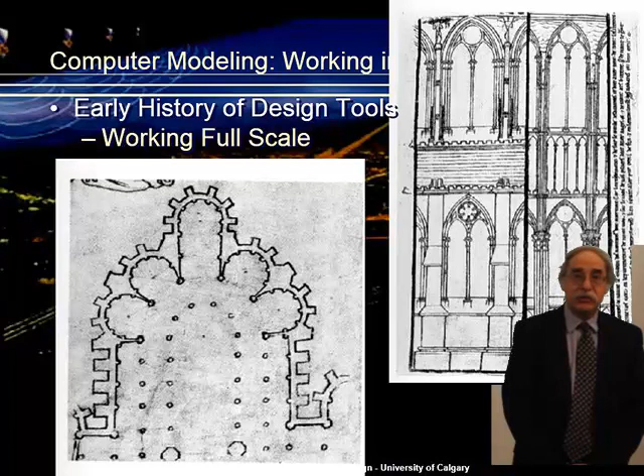We also see the use of models, fairly large models in some cases, that were used to impress the client. Now, these models could cost as much as a small building, but they were used to get the idea across to their clients—not so much to create the design itself as part of the design process, but more for marketing as we think of it today.

So in the history of design tools, we're looking at architectural drawings in the Renaissance that architects use today. These architectural design drawings include things like perspective, elevation, section, and plan. All these drawing types were actually mentioned by Vitruvius, a military engineer and architect of the 1st century BC.

If we look at architectural drawings from the 15th, 16th, 17th century, what we see is that architects are using plan and elevation to actually design their buildings. The interesting thing about plan and elevation is you can take measurements off them and you can scale your drawings, so it becomes a tool for actually managing the construction process.

Here we have one example of an elevation study done by Andrea Palladio in his four books on architecture, published in 1570. The interesting thing about these drawings is that you can use them to actually monitor the construction process. These drawings become an example for all architects for the next three or four centuries. In fact, I don't know too many architects today who don't know about Andrea Palladio's treatise.

If you think about CAD, CAD is actually a 3-dimensional object behind the screen projected onto a 2-dimensional surface. If you think about CAD as nothing more than an extension of perspective, then we really have this history that goes back to the Renaissance when we're working with CAD.

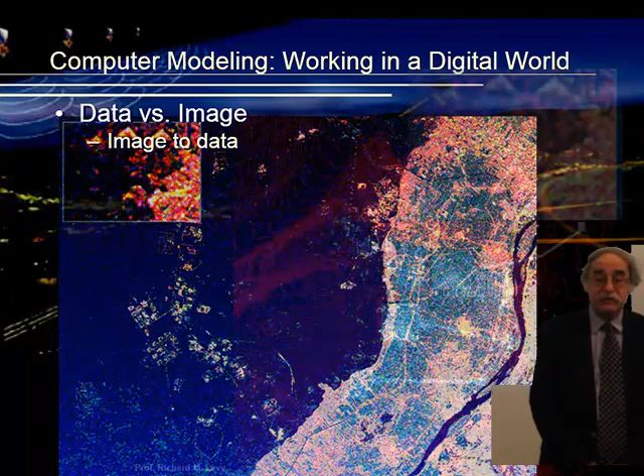From that image data, we can actually create vector models. Here we have an illustration of that: the great pyramids of Egypt, represented in a radar image, and from that we can create an actual model of the pyramids.

We can also capture today, using advanced laser technology, three-dimensional images of the world around us. I've been using this technology to preserve images of famous works of architecture in Calgary. Here is just one example.

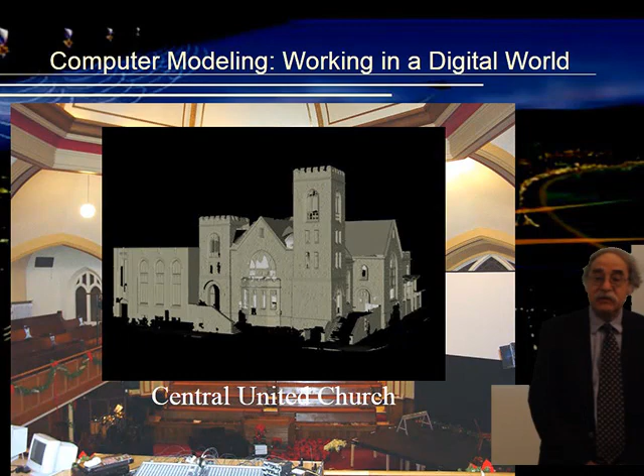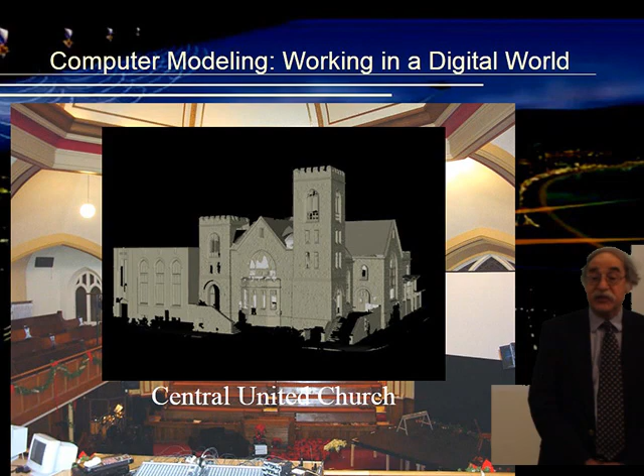This is an illustration of the kind of data you get from laser scanning. Here you can clearly see we have not only all the detail of the inside, but we can register the external view of this church with the internal view, and we now have a complete model of the building.

For urban design and urban planners, we have another form of data collection called LiDAR. With LiDAR, we can actually capture the three-dimensional envelopes of all the buildings in a city.

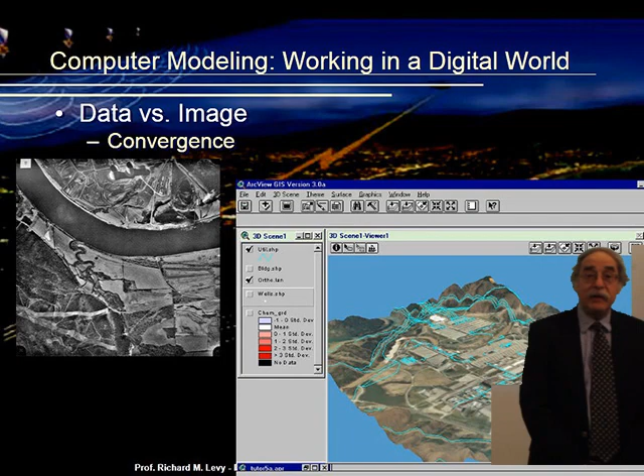You can imagine how useful this would be if you're trying to plan future growth. One of the things we're seeing in this world of data collection and processing is that data and images are actually converging. We can now take information about the terrain of our city, create a mesh file which is basically a representation of that, then drape images taken from outer space on top, and we now have a good view of how our cities actually look.

Part of the reason we can do this is because there's been advancements in computing. Computers have gotten much more powerful over the last few years. There's something called Moore's Law, which states that computers will double in power every 18 months. So what we could only dream of doing when I first started teaching over 20 years ago is now something you can probably do on the computer at home.

One thing to keep in mind when we discuss data versus image is that a picture is worth 1,000 words. But to an engineer, it's not the picture that's important, it's the data. This is a critical issue you need to understand if you become an architect or designer: the particular way their building is represented is very critical. To the engineer, just knowing where all the nodes are for his structure is all they need to calculate stress and strain. But for the architect, it's how that building is going to look that's critical. So how we manipulate our data is going to be very important to architects in terms of representing their work.

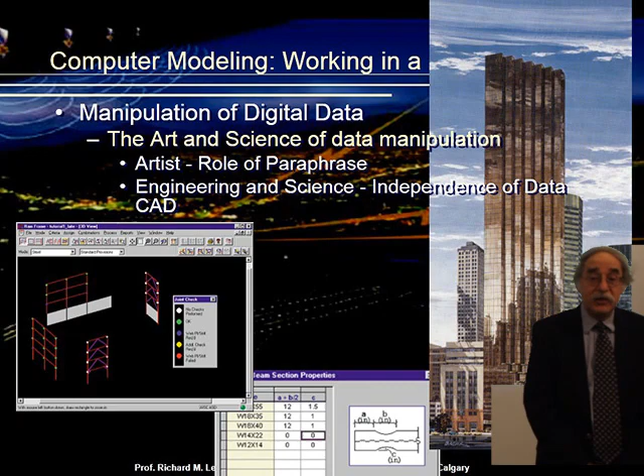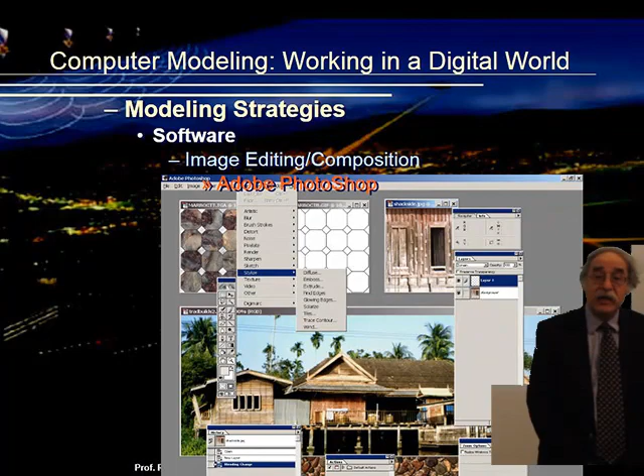If you come to the University of Calgary, you're going to learn a lot about design, and also about the tools designers use. Some of these you've probably already used, such as Photoshop for manipulating and editing image files. You'll also learn how to use CAD, computer-aided design. Many of you in high school may have studied AutoCAD, but there are other applications as well, things like Vectorworks, ArchiCAD, and Revit. Each one is designed for a particular purpose, and depending whether you're an industrial designer or an architect, you will use different types of applications.

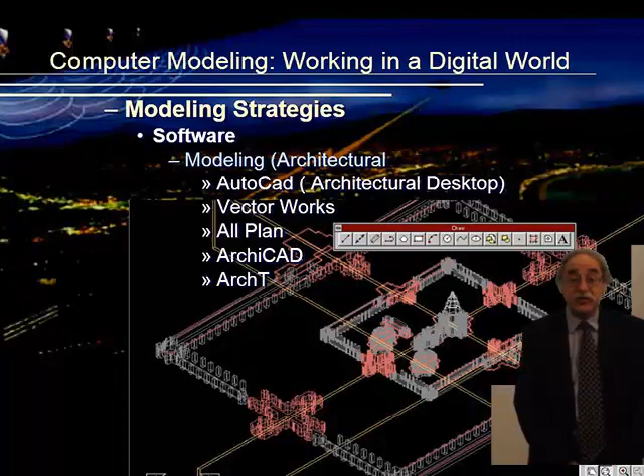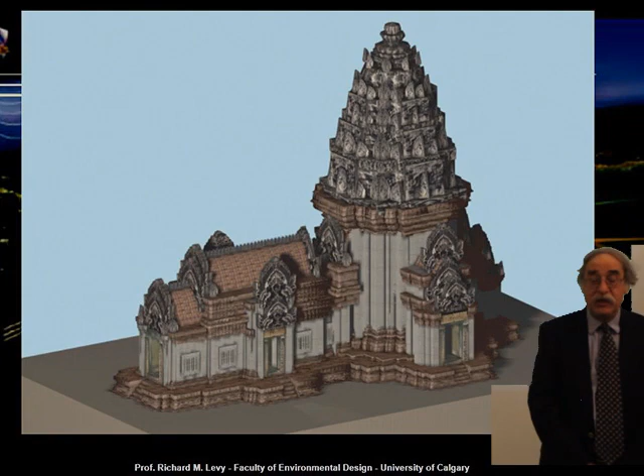Here's an example of what you can do with CAD. This is a project I was involved in a number of years ago where we were trying to recreate a temple in Thailand. We had pictures from which we created a mesh file. Once we created the mesh file, which is basically the raw geometry, we could then apply images to the outside of this geometry to make it look photorealistic.

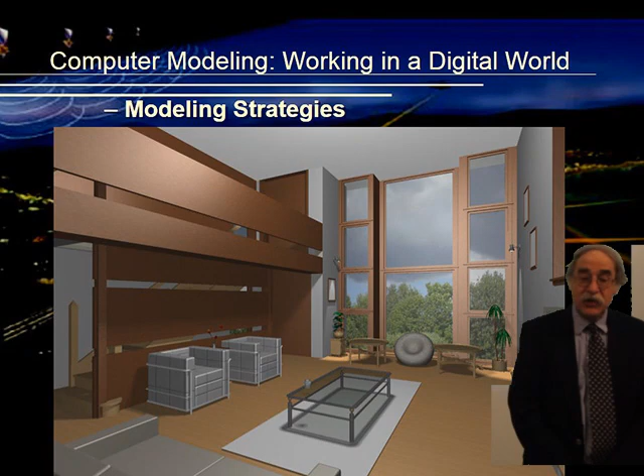I just want to show you one example of student work done here at the University of Calgary. This is a rendering from a computer model done in ArchiCAD, which is used by architects to design buildings. Here you can clearly see that what's represented is not lines, not cubes and primitives, but actual objects like tables, chairs, and windows.

Now I want to turn to the use of this technology in planning cities. Many of you will come here and study urban planning at some point, and I think it's important to understand this tradition of using drawing and architectural design techniques to create and project cities as they will look in the future.

In the history of planning, most of you are familiar with Paris. Under Haussmann, he redesigned Paris to make it look the way it does today. If you walk through Paris, you'll see the facades as a result of what we'd call today zoning and bylaws represented in the buildings. All those facades look the way they do because of the regulations imposed on the city. In the late 19th century, with the City Beautiful movement, we see this same tradition of great big plans being projected for cities like Chicago, Washington D.C., San Francisco, and even Calgary.

Now I want to talk about how we can use some of these new computer visualization tools in planning and design. We have something called planning review, where we look at designs for a new subdivision or perhaps a new part of the downtown core, and we actually have to review what these buildings are going to look like.

Traditionally, as planners, we would look at drawings, but today we have new technology, and that new technology can make it very clear to a community what these buildings will look like when they're actually completed.

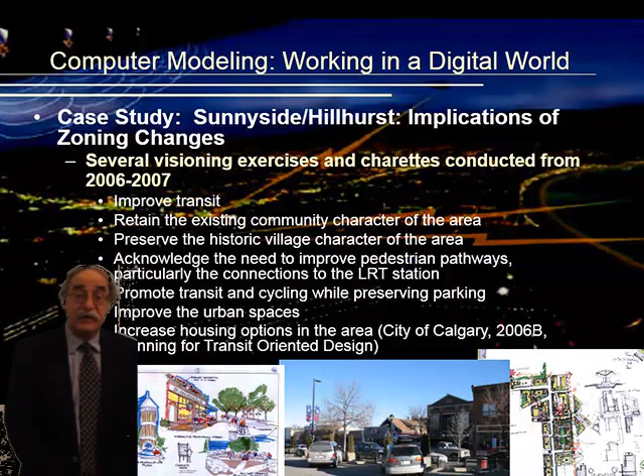Starting with the drawings done by the engineers and planners for the city, we developed a model of that community. From that model, we could show people what the implications of new zoning might be on their community. Zoning dictates the size of the buildings, and in some cases their architectural character, as well as setbacks and heights.

So working from the maps that planners traditionally use, such as this one here that shows the land use, and this illustration that shows you building heights, I could create a plan that shows the way this community would look in the future.

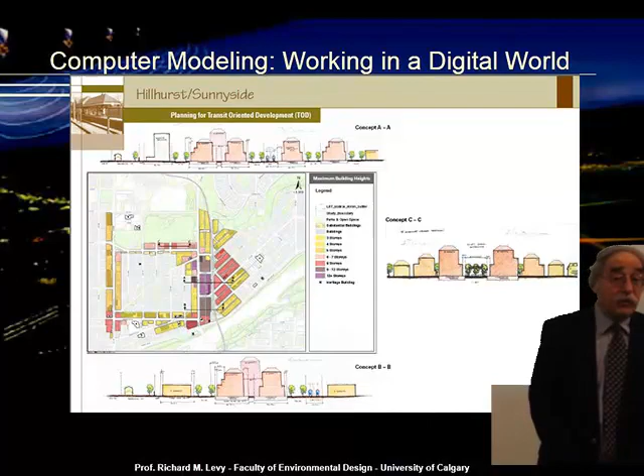The purpose was really to give the community a sense of how their city would look once it was completely built out to the new zoning envelope. Here is part of the model, and I'm showing you this just to give you an idea of how large the model was. We built this using computer-aided design technology and modeling technology.

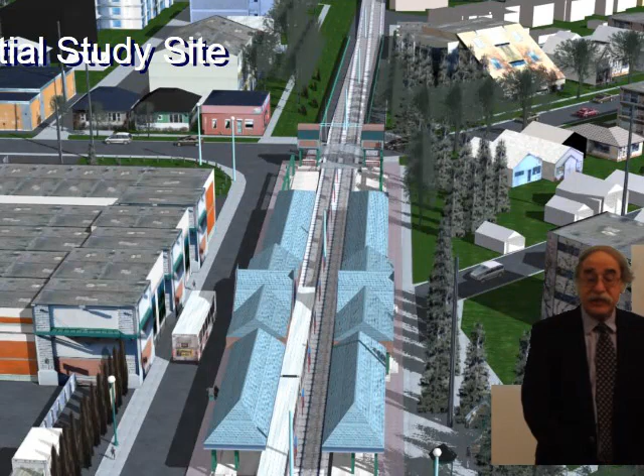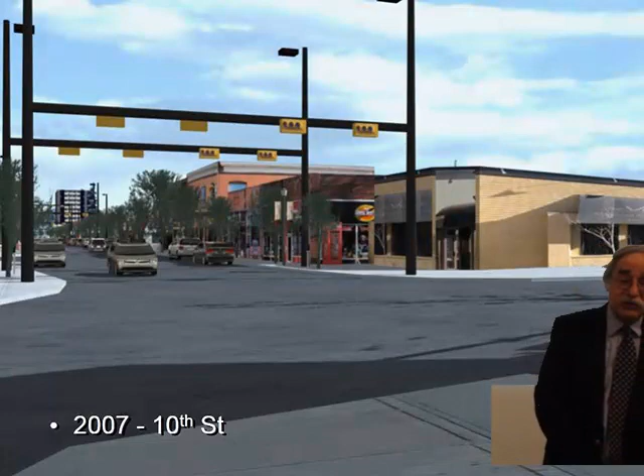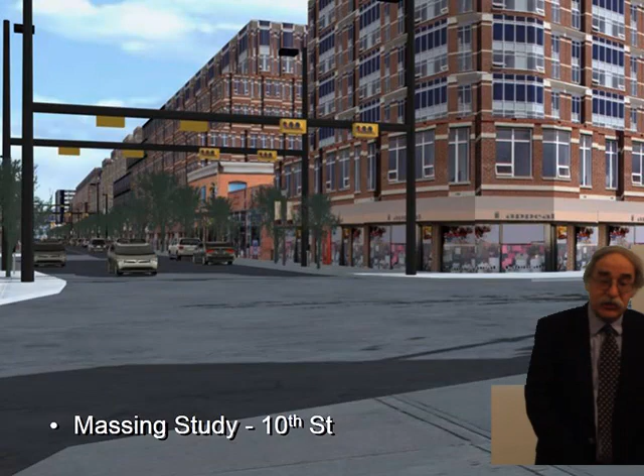We placed this model inside a virtual world, like a video game. By placing it inside a game engine, we gave the community the opportunity to actually walk through this city and experience it the way they would do every day. The advantage of that is they're viewing it as pedestrians walking through the space, not as architects in plan and elevation. Architects have a very good sense of what buildings will actually feel like when they walk around them.

For most people in the community, looking at a plan or an elevation doesn't really carry the same weight. Here we have a computer-generated image of this community in Calgary, showing the existing buildings. But once the zoning is in effect and these buildings are replaced, this is the image you would see.

We use this technology to get feedback from our community, to find out what they liked and disliked. That way we could go through a design process, which is an iterative process, to come up with solutions the community would appreciate.

Now, one thing I'd like to point out is I'm showing you single images, but by placing these models inside a virtual environment, I can call up these different scenarios just by hitting a keystroke. I can also walk through the street and imagine what it's going to feel like to actually live there. In the virtual worlds I create, the buses go up and down the street, the LRT works, and you get a real sense of how it's actually going to feel.

Our urban environment is not a static environment, but a very dynamic one. And unless we experience our cities in those terms, we really don't understand the implication of policy on design.

I want to close my discussion with how information technology and design technology has changed our worldview of cities. If you look at digital design, it's really changed everything. In the past, companies would create objects and sell them to customers, maybe using a wholesaler and retailer in between to get products to market. But today we have a whole new supply chain, something you're beginning to experience.

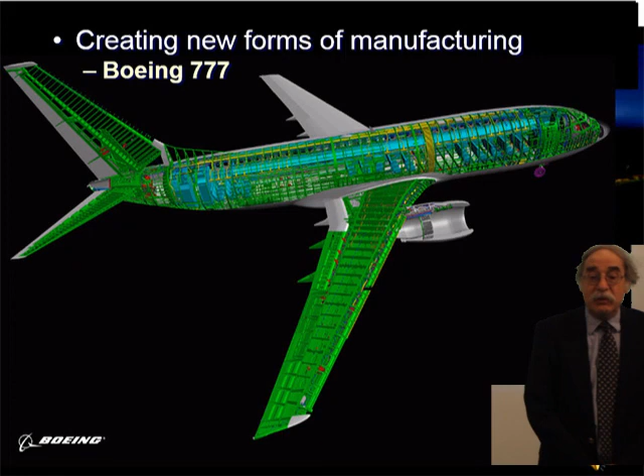If we look at the history of design in just the last few years, when we've gone from paper to computing, we can see airplanes like the Boeing 777 now being done completely inside the computer.

Why is that important? It's important for several reasons. One, it made the design cycle much shorter. It made it possible for them to create an airplane with much better fit. And it made it possible for them to build this airplane in many locations, bring it together, and assemble it.

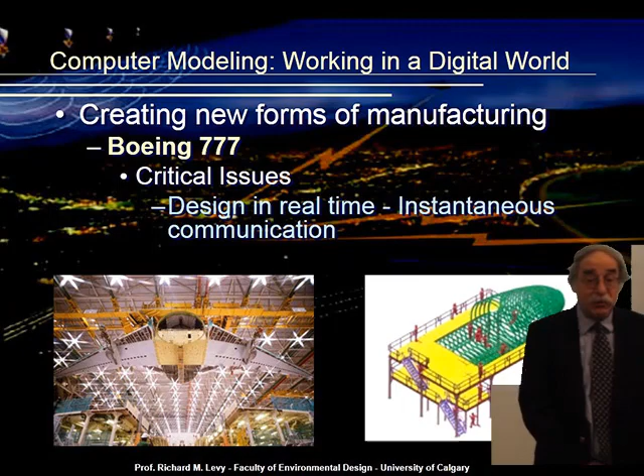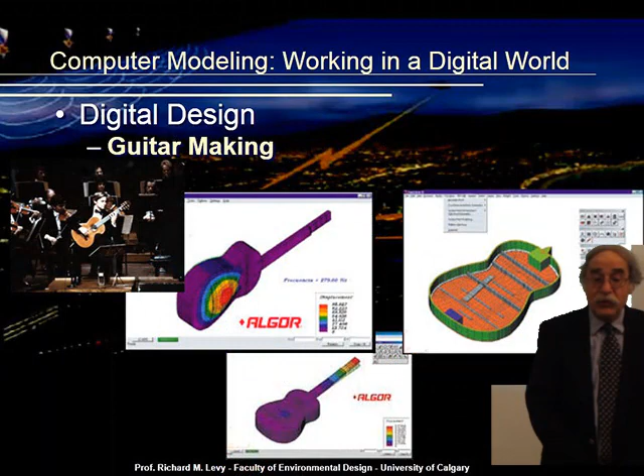We can apply this design technology to many professions. In architecture, we can use this technology to create the structure of a building. We can also use the same technology to design a guitar.

So I want to end my presentation with a few questions about our digital world and how it's going to impact the urban landscape. Think about how we approach the city today with all the new technology, and how our cities of the future will reflect the technology we take for granted every day. Here's a question: will our cities look more and more like video games?

When we walk through our worlds, will we expect them to respond to us like a video game? Will we create our cities using this technology as we would create a video game? Will we use simulation to see how people would respond to our world before we actually build it? Or will our cities just look like games but not really be truly interactive?

I don't think that's going to happen, because most of you have smartphones and tablets, and you expect the world to respond to you when you're walking down the street or riding on a bus. You want to get that information about the world around you. So cities are becoming more interactive, and urban planners need to adopt an approach that incorporates new technology into the design of their communities.

In closing, you've seen a lot today dealing with design of buildings and cities, but we also have to think about, once they're created, how will they continue to maintain contact with all those databases people are creating? Will we create cities that are, in a sense, interactive worlds? Will we create a web space that looks like a city, an interactive environment in itself? Will IT be integrated into all aspects of our life?